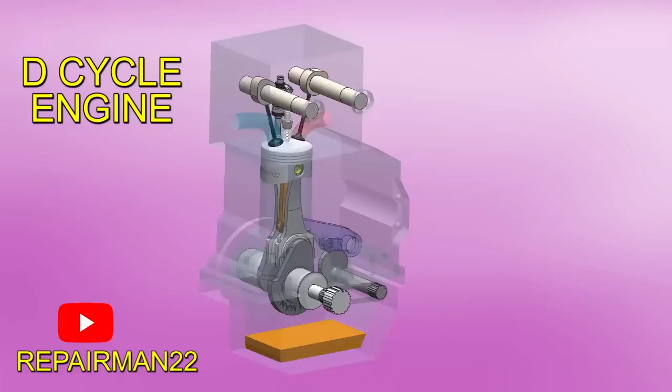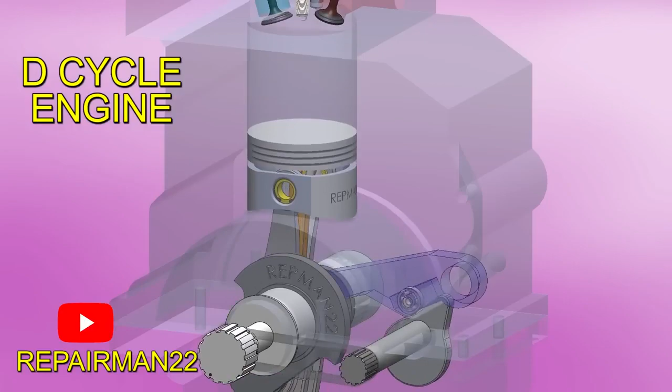This is the D-cycle, or dual-cycle engine, and it basically combines the advantages of a two-stroke and a four-stroke engine. To achieve this, various parts are added, such as the split piston. But is this engine really superior?

Well, tests have been carried out with a three-cylinder Ford Fiesta and a straight-six turbo diesel military truck. So let's analyze in 3D how it works and discover its real advantages.

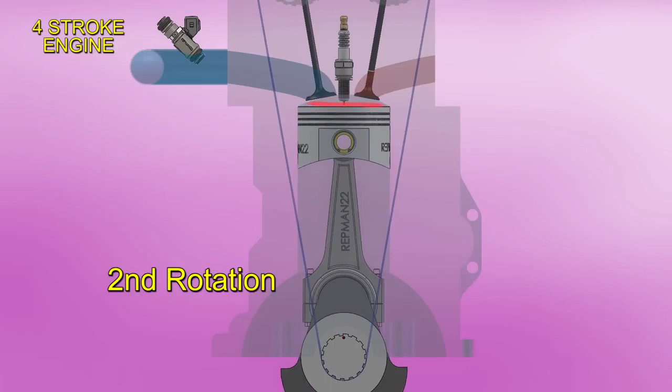A four-stroke engine has to make two rotations to produce power. In the first rotation, it makes the intake and the compression stroke. Then in the second rotation, it combusts and exhausts. Two rotations are needed to burn fuel, so the cylinder is only used at 50%.

The connecting rod operates at full load in the combustion stroke. Then, in the other three strokes, the load is low, so in those moments, it is found to be oversized.

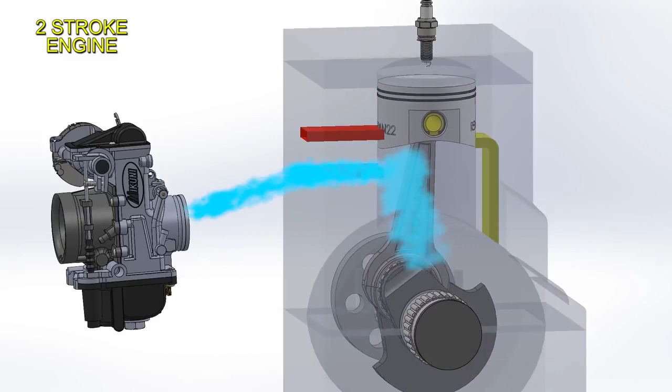Now, a two-stroke engine must use the crankcase to draw in the mixture, then pre-compress it to send the mix to the cylinder, and finally recompress and burn. This means that oil cannot be placed in the crankcase, since if there were, it would be dragged into the cylinder and burned. That's why oil is added into the mix, making the engine pollute.

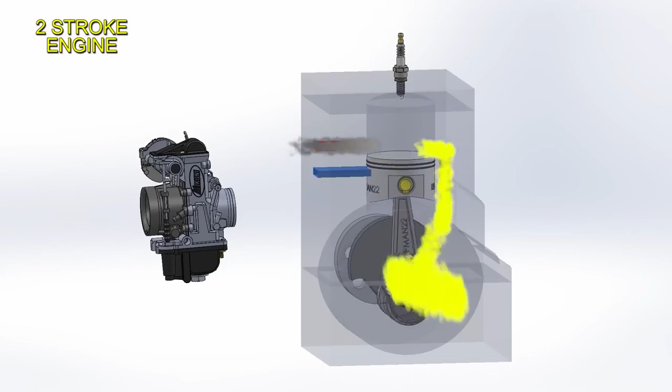However, this engine completes the cycle in a single revolution of the crankshaft, so the cylinder is used at 100%, producing more power compared to a four-stroke. Now, what if we could combine these two engines into one? Let's see in detail how it works.

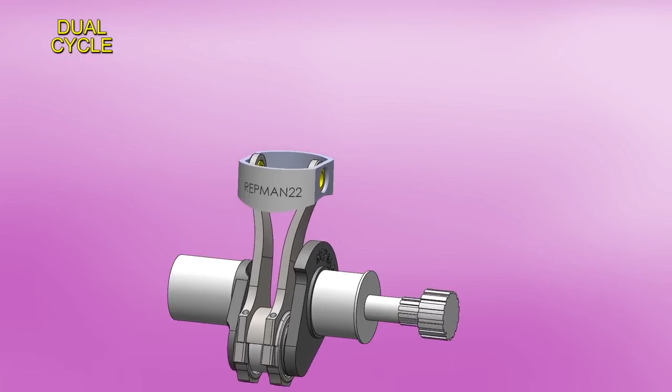We have a crankshaft like in any engine. The connecting rod is divided into two columns. This connecting rod is attached to the skirt piston, which has no crown. Then we have the crown piston, which has three rings like any other piston.

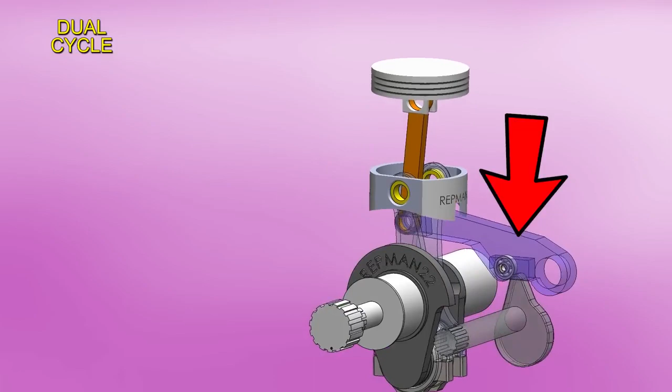This crown piston is driven by another connecting rod. This other con rod is attached to an arm. The arm has a bearing. This bearing follows a cam with this shape. This cam is connected to the crankshaft. They both spin at the same RPM.

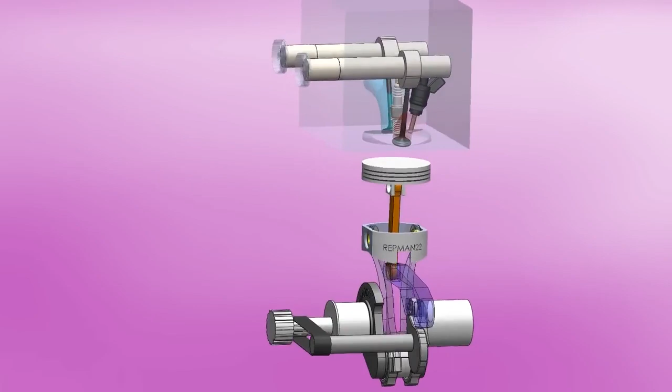The cycle begins with the piston separated. The crown descends, sucking in the air while the skirt goes up. As soon as the pistons join, the intake valve closes and the compression stroke begins.

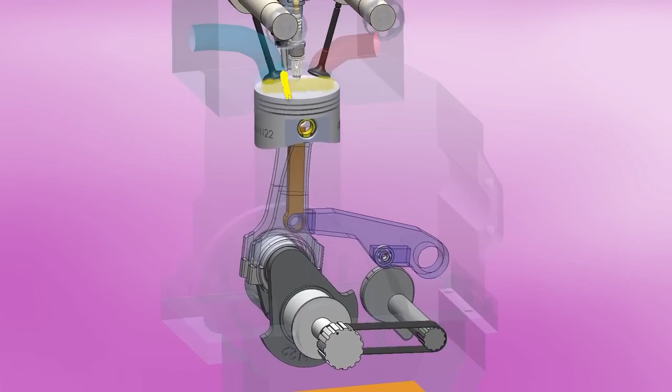While the piston travels up, the direct injector adds fuel. The spark is fired and the combustion stroke begins. Power is transmitted to the double connecting rod and to the crankshaft.

Going down, when the burn gases no longer have enough useful power to transmit, the exhaust valve opens and the crown rises suddenly, clearing the cylinder. Then the intake valve opens and the exhaust valve closes, starting the intake stroke again.

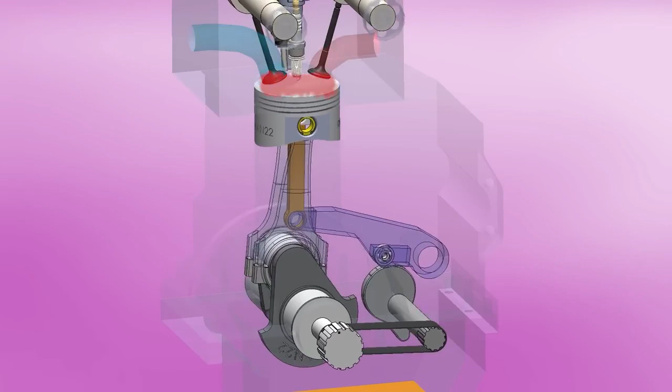As can be seen, the entire cycle is done in just one turn of the crankshaft. The piston divides to make the exhaust and intake stroke, which are the two cycles where the load on the connecting rod is very low. Then, the pistons come together to receive the full power of the explosion. In a few words, just like a two-stroke engine, the main cylinder now works at 100%.

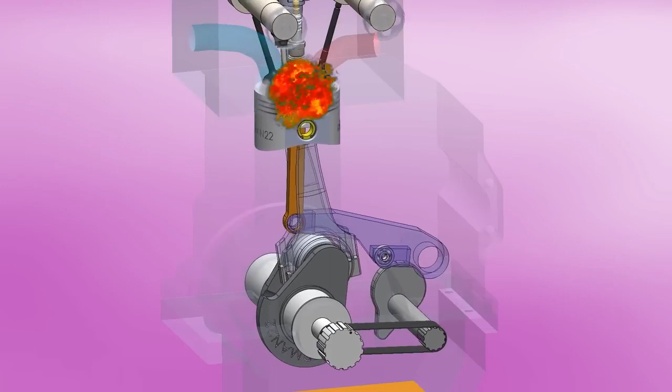In 2017, after publishing its prototype in 3D, Yan Engines received an investment of $1,320,000, and with this, they invested in research and development to transform an engine.

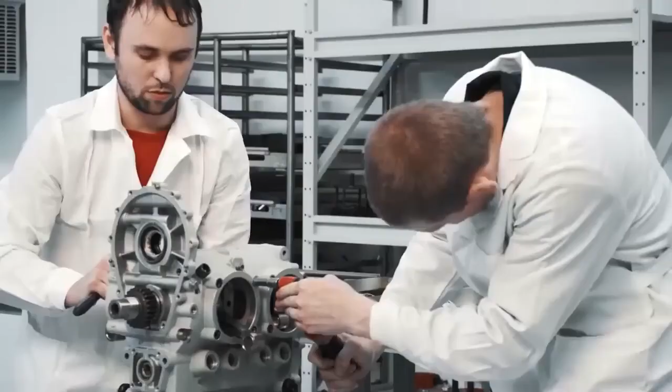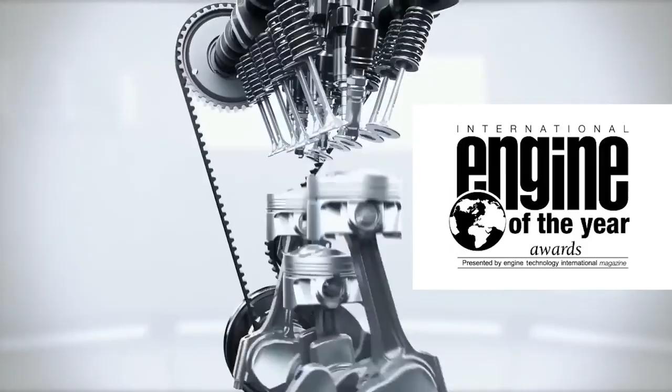A Ford Fiesta EcoBoost 1-liter engine with 99 horsepower was chosen because it won 6 consecutive times the award for the engine with the lowest consumption. This means it will be easy to achieve good results. It only has 3 cylinders, making development easier, cheaper, and saving a piston.

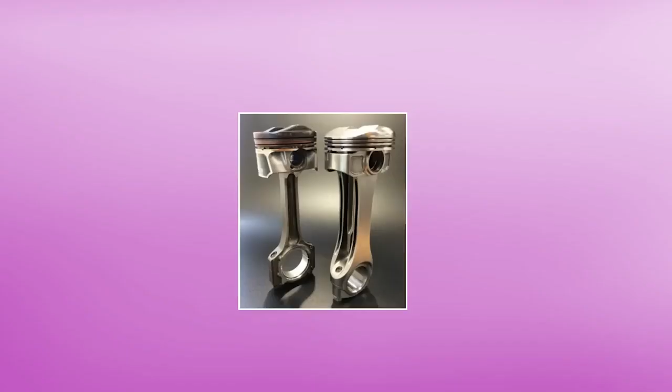This engine was modified and tested on the dynamometer with amazing results, giving 20% more power without increasing fuel consumption. Here, we can see the comparison of the piston and connecting rod, original versus D-cycle.

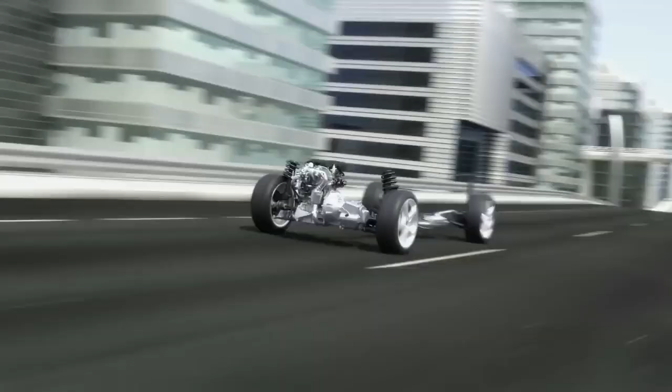Then, to ensure the results, the engine was installed in the Fiesta and used on the street. The test ended confirming the good numbers previously achieved on the dyno. The modified engine withstood the turbocharger pressure without problems.

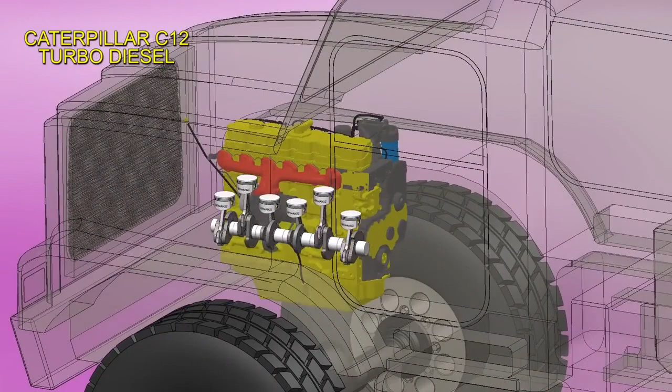Seeing that the project was on the right track, Yan Engines spoke with the United States Marine Corps, who gave them an MTVR for testing. This truck is originally equipped with a Caterpillar C12 turbo diesel engine of 11.9 liters and 6 cylinders, generating 425 horsepower. The engine was modified with the D-cycle system and tested.

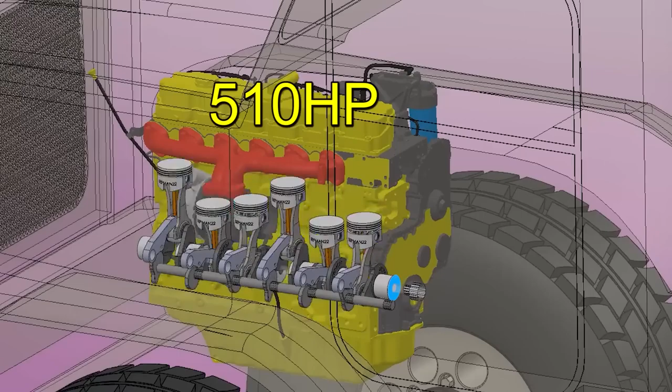First, it was forced to idle for a long time. Then soft acceleration tests were carried out, and by the end of 2019, testing in extreme driving conditions was finished, with final gains of approximately 20% in horsepower. This shows that the D-cycle engine can run on diesel without problems. If this project finally reaches the production line, fuel costs and autonomy could be greatly improved, reducing the costs of everything transported by truck.

But let's see the disadvantages and problems of this engine. One: the piston must have a windowed skirt to allow passage of the auxiliary arm, increasing the pitch of the piston and therefore wear and noise. Two: by having a split piston, the crown separates from the main body and has less surface area for cooling.

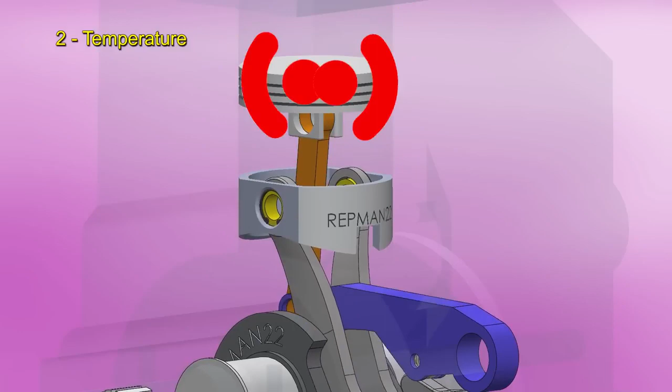Let's remember that the combustion chamber works very hot, and limiting piston cooling may probably result in catastrophic failure. Three: extra oil injectors must be added below to cool the crown, and with the skirt so low, it is possible that oil leaks into the cylinder.

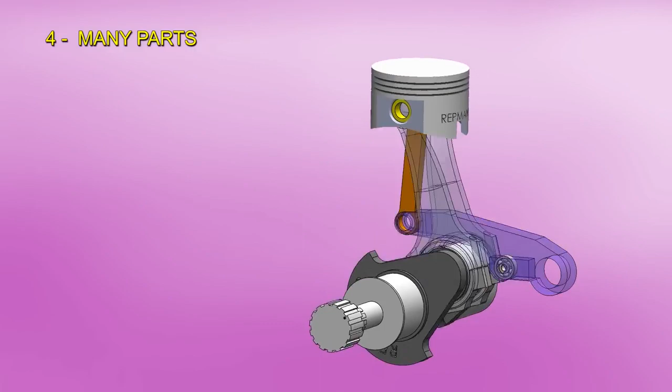Four: it has more than 5 extra moving parts prone to failure, and above all, the bearing that follows the cam will be required at great load. Place your bets to see how long it lasts.

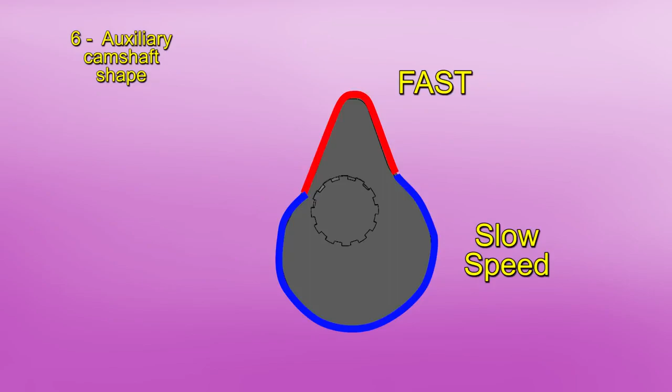Five: the crown piston will suffer double wear versus the skirt piston since it goes at double speed. Six: the shape of the auxiliary camshaft makes the crown piston run at very high speeds, so it can easily be deduced that it will not be able to rotate at very high revs. That is, if the engine rotated at 7,000 RPM, now it must do so at a maximum of 3,500, preventing the auxiliary piston from exceeding 7,000 cycles.

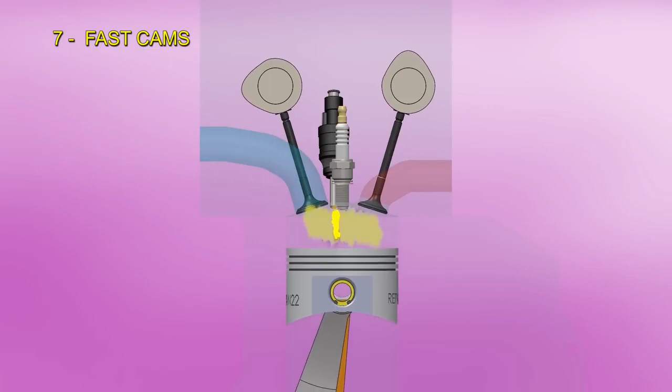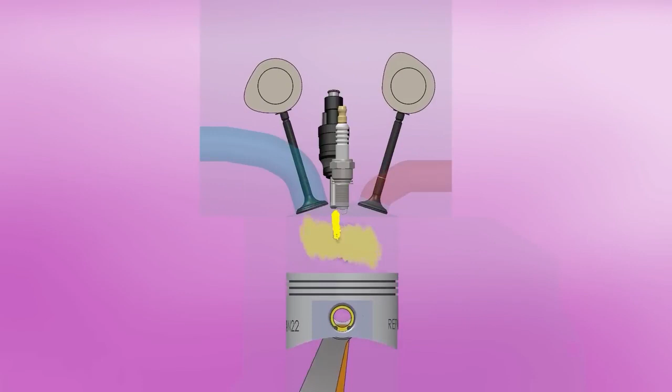Seven: the cams now rotate at twice the speed versus a 4-stroke engine, having aggressive ramps for the valves. The intake and exhaust stroke will be performed twice as fast, decreasing gas flow. At high RPM, air won't have enough time to enter the cylinder, resulting in partial charge and therefore reduced power.

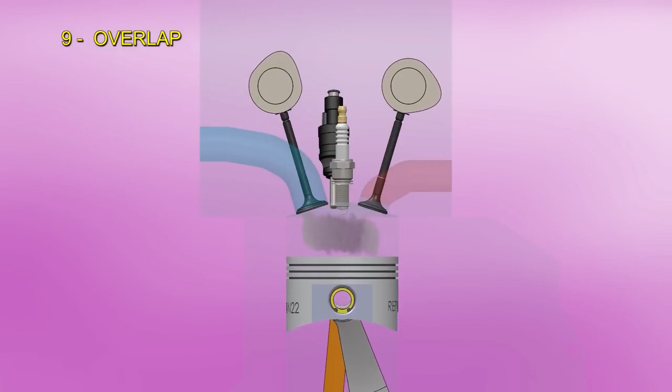Nine: due to the short time of the exhaust and intake strokes, overlap timing cams must be used, which will lead to the loss of clean air through the exhaust and poor idling.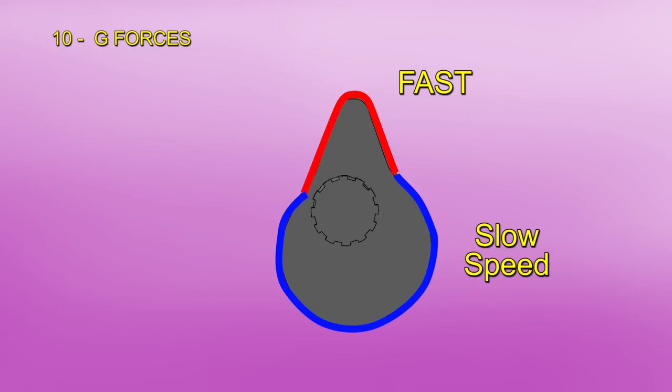Personally, I'm very concerned about this piston speed variation. How will the G-forces be? Will it resist? How does this result in vibrations?

I couldn't find videos of the tests mentioned by Yan Engines, just some low-resolution photos. The Yan Engines website shows some information, the modified Ford Fiesta, the military truck, among other things.

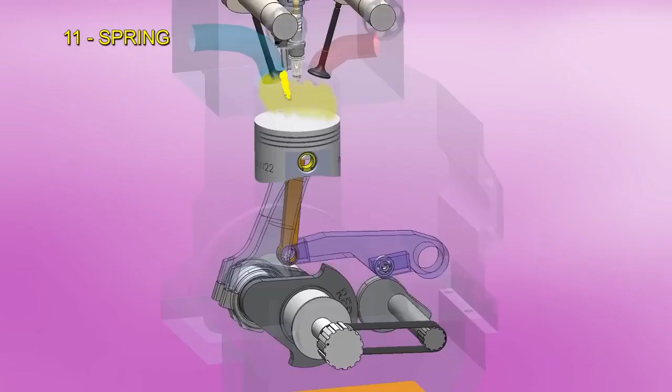Eleven: a spring is needed to make the arm with the piston come back, otherwise it could float or continue its journey upwards, colliding with the head. The ideal would be a desmodromic system, which translates into even more parts.

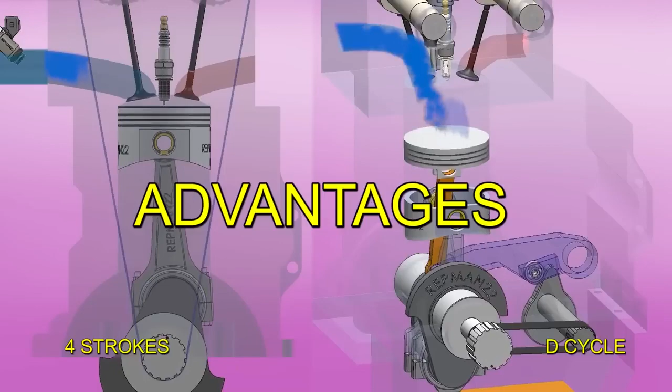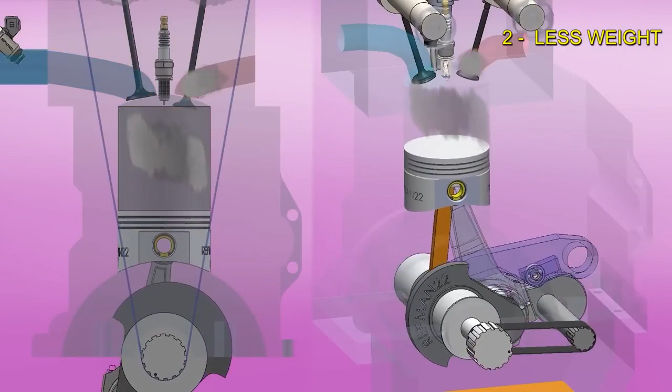On the other hand, its advantages are: one, substantial improvement in the power of an engine on the same displacement, since the cylinder is used twice as many times. Two, this leads to less weight since the size of the engine can be reduced. Three, less friction - the crown piston has a smaller skirt and is therefore lighter.

Being the only part that moves at high speed, the inertia is reduced. The heavier skirt piston moves slower and only half the time of a 4-stroke engine, reducing friction. These improvements give better fuel consumption.

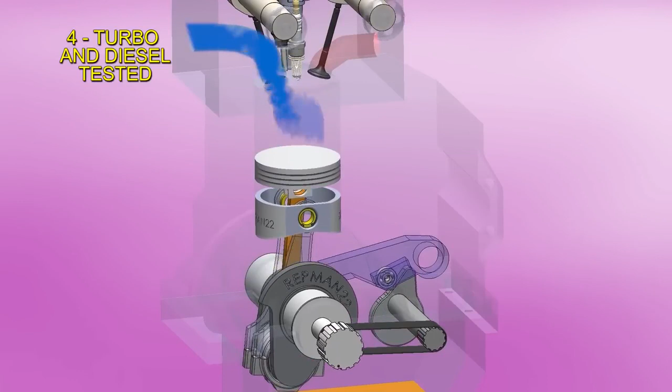Four: it passed the test with turbo and also with diesel. Five: in engines with the camshaft in the block, the piston cam can be shared with the valve cam, since everything rotates at the same speed, saving parts. In fact, this was what was done on the Caterpillar engine for the military truck.

Do you have faith in this engine?